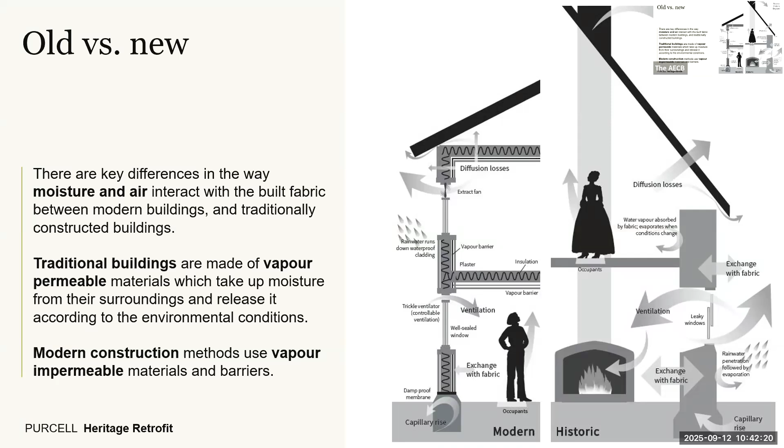And the other thing to consider, and this is true of any building, is that a building is a system, so there's lots of interconnected components, people, services that all interact with each other. So if you change one of those components without considering how it connects to other things, you'll have a potentially negative knock-on effect to something else. So for example, if you seal up all of the windows, insulate, and you've increased the air tightness of a building without thinking about ventilation, you will have unintended consequences.

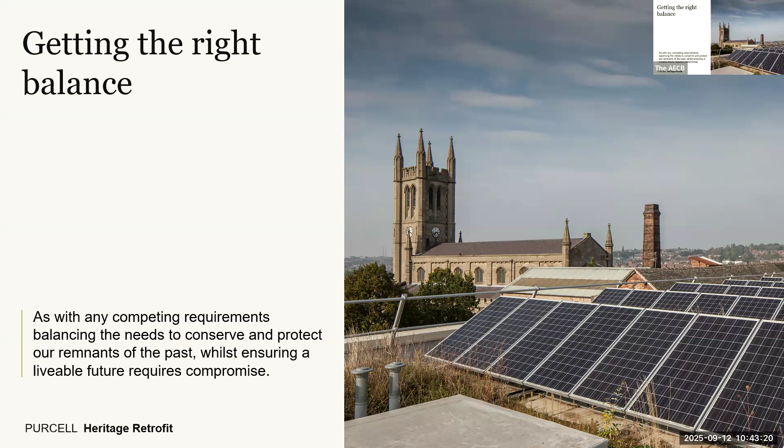And so in heritage, it's always about getting a balance right. It's always about measuring the harm versus the benefit. And there's always going to be compromise. I think there isn't any project on new build or retrofit that doesn't involve compromise. So I think it's just about how you tell those stories and how you get the best outcome for the building and the occupants. And obviously, you all know already the AECB resources, so I haven't got those on here, but there's a few others that might be useful. So there's PAS 2035, which is for retrofitting housing, and PAS 2038, which is for retrofitting non-domestic buildings.

Both have quite a clear process of how you go through things, and it does add on to how you deal with that in heritage properties. The STBA has this amazing wheel which defines that system, the building as a system approach. So you click on one element and it tells you through these linked diagrams what the knock-on effects of changing that would be. It's a really good interactive tool, I recommend it.

And then last year, Historic England brought out this Adapting Historic Buildings for Energy and Carbon Efficiency. Historic England have been really trying to help with these kinds of conversations. I think they don't want to be seen to be lagging behind the narrative on climate change. So they are spending quite a lot of resources and energy in this space. So that is another one that is good to have a look at.

We also have our own toolkit, which we developed with City of London. So I'm going to talk through that briefly. This started out because City of London has got a net zero target of 2040 across the entire Square Mile. For anyone who doesn't know, City Corporation is the local authority that governs the Square Mile.

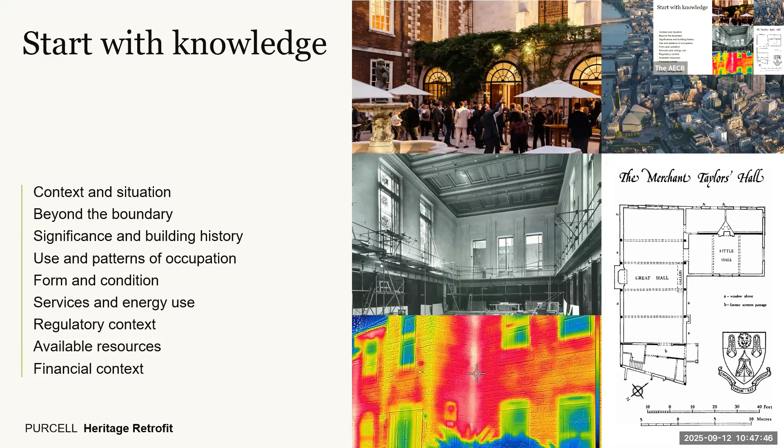And then layer that with a deep understanding of the building's performance, its condition, how it's serviced, how much energy it's using, all of those kinds of things, and start building a picture of why it needs to change and how you might do that. And the city was really keen that we had, quite upfront in the process, this identification of climate risks.

They've spent quite a lot of resource and time looking into climate resilience in the city. They've identified 6 key hazards. Most significant to historic buildings would be overheating and flood risk. And they wanted to make sure that that was considered as part of this early process.

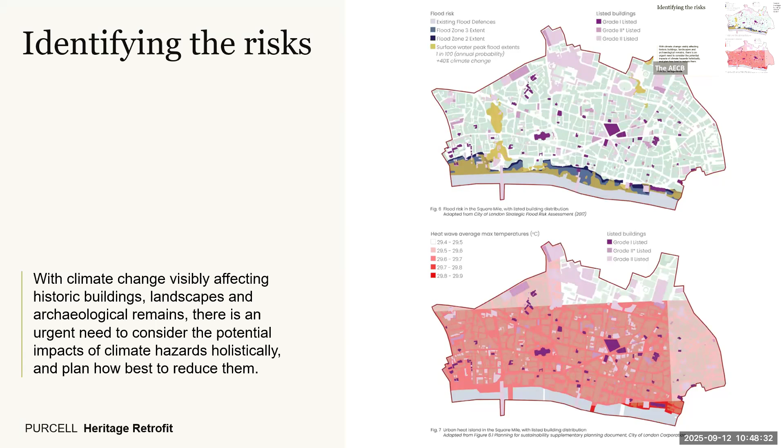And really that's to avoid abortive work. If you're doing something now that has to last for 30 years, the climate's not going to be the same in the next 10 years. We already know that from this year. So I think having that future-focused process early on is really important to them.

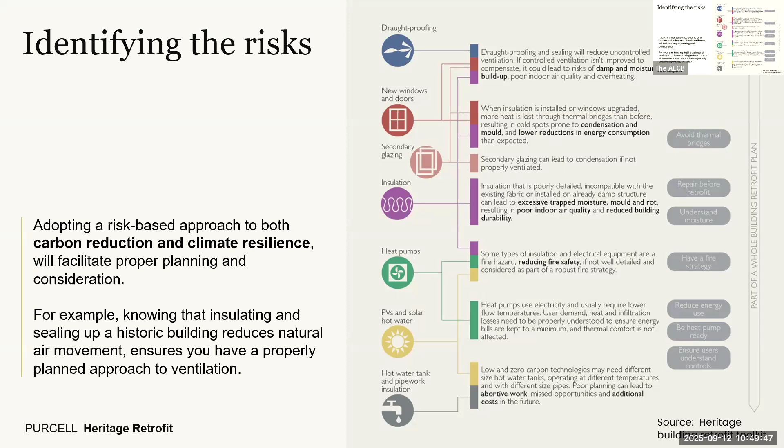The other thing when identifying risks is what I touched on earlier around the differences between new modern methods of construction and traditional methods of construction, and that potential for maladaptation, the potential for changing something with unintended consequences. And that includes potentially damaging heritage and historic fabric, but also the indoor air quality and things, and understanding the interconnected links between those. And I will credit, so this diagram I redrew just for the graphic style, but I would credit LETI because this was largely learned from them.

And then the third step is about evaluating opportunities, and I'm always for putting everything on the table and then taking things off when you're told to. And I don't believe that there's ever an argument of you can't do anything. I think there's always something to do. And I think this hierarchy helps you think through that process. So we've talked a little bit about knowledge and starting from a deep understanding of the site. But the first step after that is around eliminating unnecessary energy and resource wastage.

So do you have gaps and cracks? Do you have windows that aren't sealed properly? Do you have spaces that are being heated but not used? Do you have occupants that just leave the doors open or leave the windows open in cold weather? It's really looking at how the building is being used and what condition it's in.

Then it's about mitigating the impact of unavoidable energy and resource use. And that's more around what easy wins, what lower hanging fruit can you do, LED lighting being the obvious one. You'd be surprised how many historic buildings don't have LED lighting. Energy efficient appliances, efficient use of space, zoning. Can you change the controls easily to just zone things differently? Turn your thermostat down 1 degree.

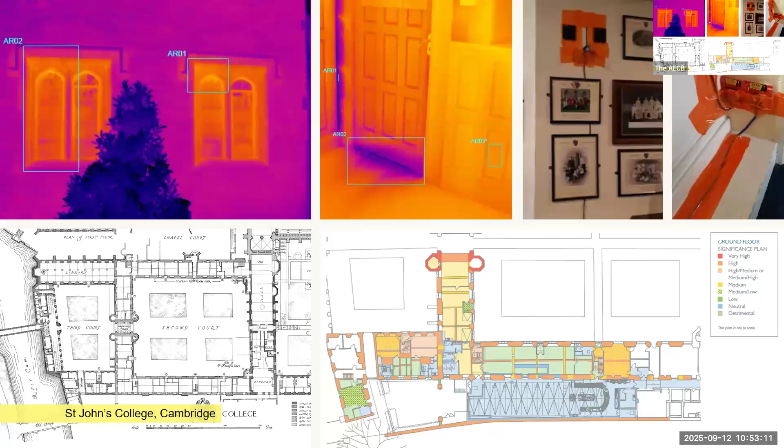And following that process, starting from a position of knowledge, I'm going to start with the bottom right-hand image. That is a significance plan, and is a really common way of depicting in heritage how significant different parts of your building are. Just because it's grade 1 listed doesn't mean that everything is the same age, doesn't mean that it hasn't changed over time.

And what you can see from this is that the very high, the kind of red areas, apologies for anyone who's colorblind, these drawings are not helpful for you, but you could take my word for it. So the very high being red, going down, and then the low significance, you can see kind of like the floors, some of the internal partitions, because they've been changed over time, they've been altered.

So here actually a kind of newer concrete slab had been poured on the ground floor. There had been lots of changes to the internal partitions. There's timber paneling to the inside face of the rooms, which they did a huge gazetteer of information about from the archives of the college, just to prove that things had been moved around, things weren't always as they'd originally been built.

And then layered on top of that, there was a lot of investigation into the performance of the existing building. So you can see some thermal imaging shots there, just showing the drafts, heat loss through the windows. There were some U-value calculations done. I'll tell you the U-value test ranged between 2.38 and 0.35 on the external walls. And that was on the same wall. So there's no consistency whatsoever.

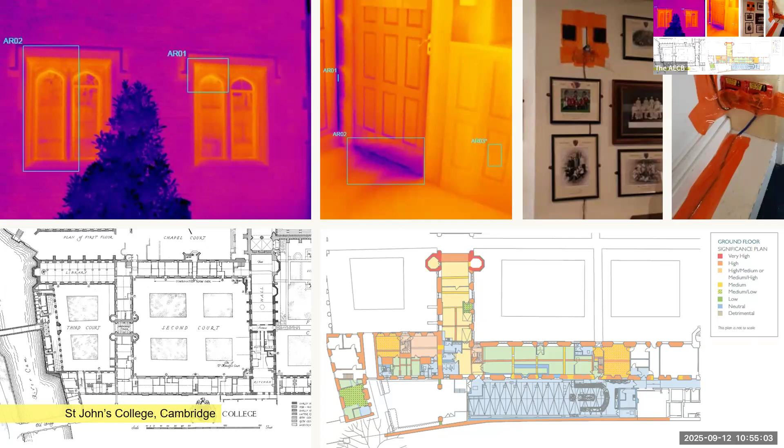There was an air permeability test done, and that got 28. So you can see when you're trying to get to the standards that are set by AECB, you've got a long way to go. But all of that backs up the MEP consultants, KJ Tate, and they did a lot of modelling with IES, and we developed 7 different options. Model 1 was the existing option, around various levels of intervention.

I'm not going to go into the detail of all of it, but Model 4 was deemed to be the one that saved the most energy, saved the most carbon, but with the least seemingly drastic intervention to the historic fabric. And the only difference between that one and the one that was the most energy saving and most carbon reducing was the glazing, which I'll come back onto.

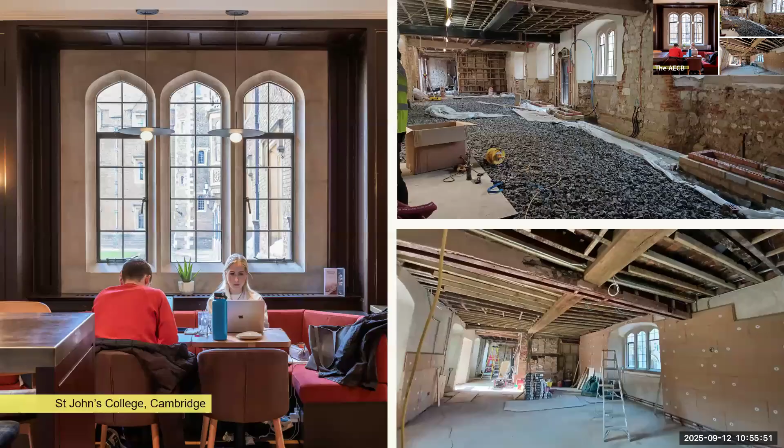So you can see here, this is a grade 1 listed building. You can see the level of intervention that was carried out. The whole floor was taken up and foam glass insulation put down and a limecrete slab. And then there was wood wool insulation put onto the internal face of the external walls. There was soffit insulation. And I think this just shows that you have to break eggs to make an omelette, whatever that saying is. It ended up being quite significant interventions in this very sensitive setting.

And the windows was an interesting debate. It always is. I'm sure some of you might have stories of window replacements, or trying to get rid of window replacements in historic buildings. We settled on a histoglass, which is thermally enhanced, better performing than what was already there. We kept the existing frames.

We did do a mock-up of a slimline double glazing unit using the same materials, but the conservation officer and Historic England had concern about how that would look in the court, because we were only changing 4 of the windows in that court, and how it looked as a collective. Whether you agree with that or not as an approach, that's one that they took.

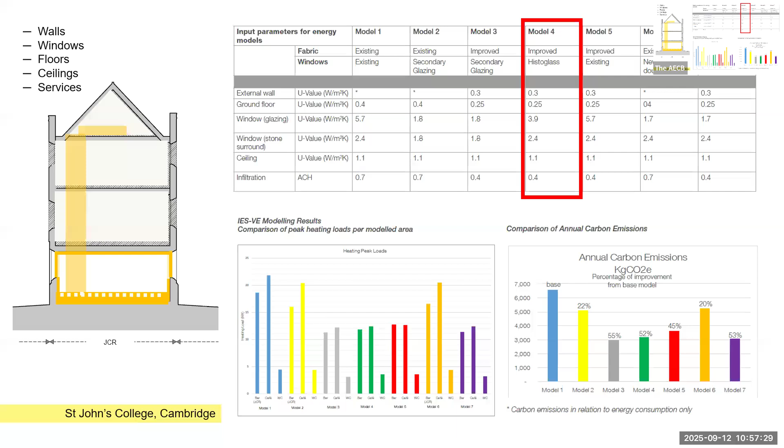And so the next project, sorry, I should say that the interventions that were selected achieved a 39% reduction in energy use and peak heat demand. So it's significant. And I think because the windows are so small in relation to the overall elevation, insulating the external walls had a bigger impact than changing the windows.

Smithdon School, it's a completely different building. And I'm really excited I get to talk about this because we've just got planning for it and I wasn't allowed to talk about it before. So I have some Smithdon School facts. I don't know if anybody knows who these two are.

Alison and Peter Smithson. So Smithdon School is one of the country's most significant modernist buildings, designed by Alison and Peter Smithson. It was completed in 1954. It's grade 2 star, so it's in that top 10% of all listed buildings in England. And it was considered a really radical approach to steel and glass. It's very modernist. And it's been used as a school for 70 years. So like most modernist buildings, it wasn't designed for climate change.

It's one big thermal bridge. It is single glazing, it's got steel sticking out, it's got no insulation whatsoever. And it's Grade II* listed. So in theory, it is an incredibly difficult building to change and alter. However, as a school, it doesn't function because it's too hot in the summer, it's too cold in the winter. There's issues with glare, overheating; they are on the verge of moving out as a school. It's a public school, sorry. Yeah.

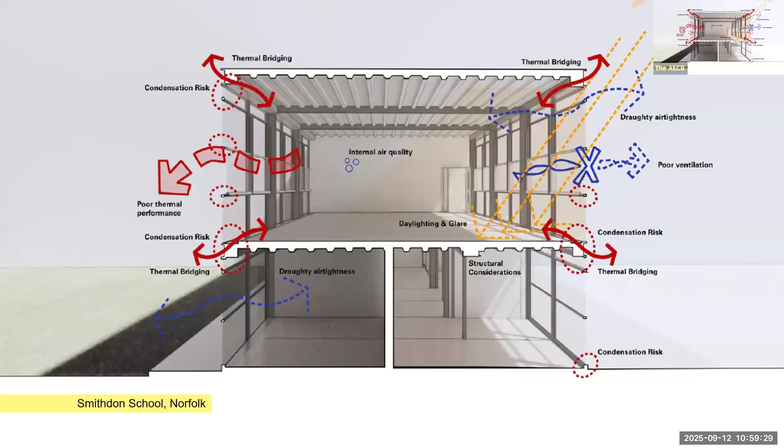And so it's quite clear that a wholesale refurbishment of this building is needed to keep it functioning as a school. And one of the things about heritage significance, I think, is that use is so often connected to what is significant about a building. So being able to preserve the originally intended use is seen as a benefit. And if you're not able to retrofit and make the alterations to enable it to function as a school, you're losing that use. I don't know who would want to work in this space, and you're then risking the future deterioration of this piece of architectural heritage.

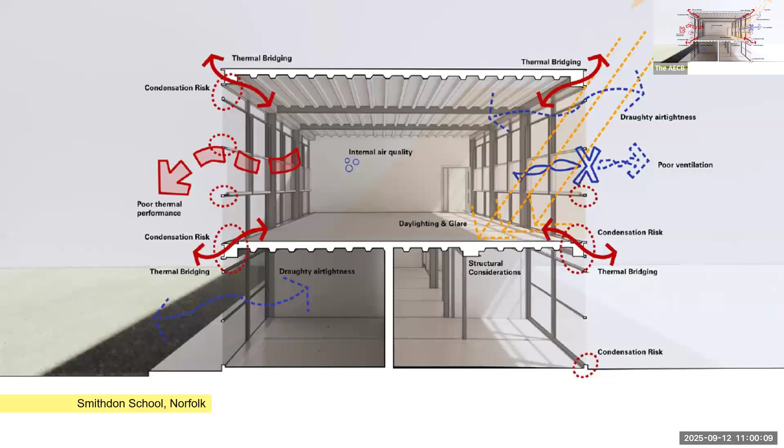This is the 3D version of that significance plan that I showed you for the other project. And the reason it's a 3D version is because you can't think about the significance of this building in plan form. It was quite clear to our heritage consultants that to understand the significance of this building, you're not considering how old the fabric is, because it's 70 years old, it's not that old. What is important about this building and why it's listed is the architectural composition of it and the steel frame.

We should say we're working with Jestico + Whiles on this as well, and Arup. But what the Purcell team did was a condition survey, which went round and documented every single window on site and determined how things had changed, what condition they were in. So this one is showing, for those of you who aren't colourblind, again, I'm sorry, the green is the original glass. So much of that building has already changed. And so you're not preserving something that is old. You're not preserving something that's original. You're preserving a framed building and the composition that it has as a piece of architecture and its use as a school.

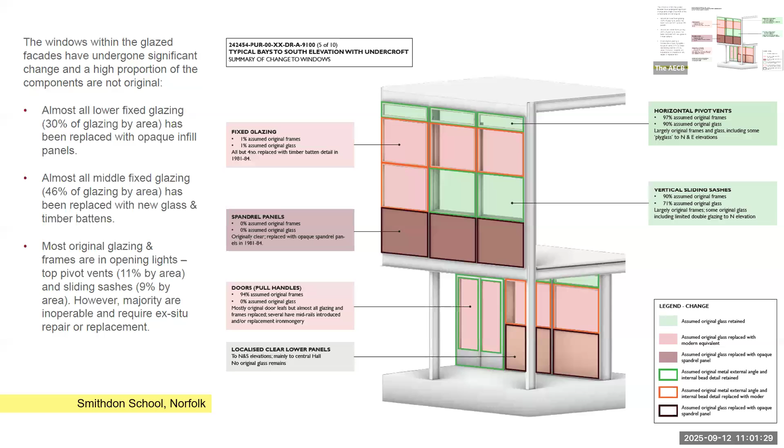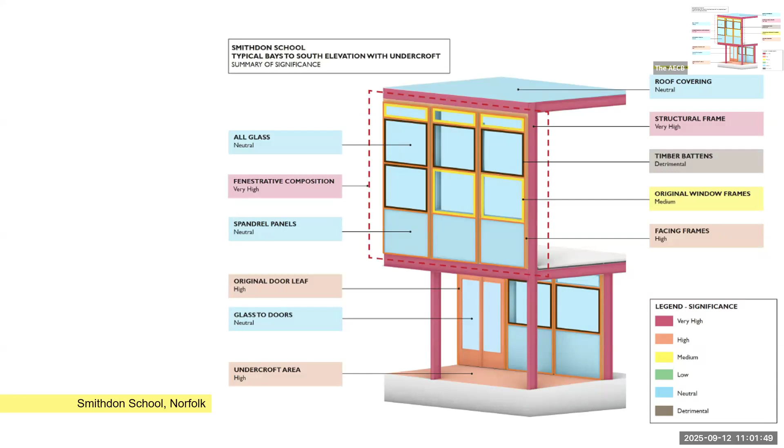So this is the significance drawing that shows the red, depicting the structural frame, is of very high significance. The blue windows and the roof covering are very neutral in terms of significance. So they're not really having any impact on the significance because they've changed it so much. And so what that framing allowed us to do was to justify some complete wholesale changes to the fabric of a Grade II* listed building. And so we're insulating, we're changing the windows, we're having them thermally broken.

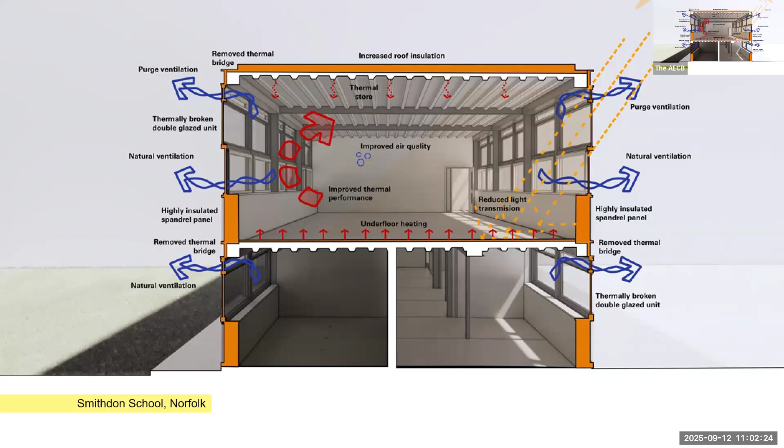Also, I haven't got the drawings here, but in the design and access statement, there's lots of different iterations of breaking the structural frame, because the window frame was part of the structural frame. So it was all connected and a huge cold bridge. It's probably better shown in this one. But how that gets detailed has already been very well thought out just at planning stage. If you went through the design and access statement, there's a huge amount of detailed drawings for a planning application.

And the reason that this has been approved at planning is because we took Historic England, the 20th Century Society, and the Conservation Officer on that journey all the way through and explained to them what is important about this building, why it's important that it gets retained and used as a school, and how the design of the building is having a detrimental effect on its ability to last any longer. So it's watch this space. It's hopefully going to be on site quite soon.

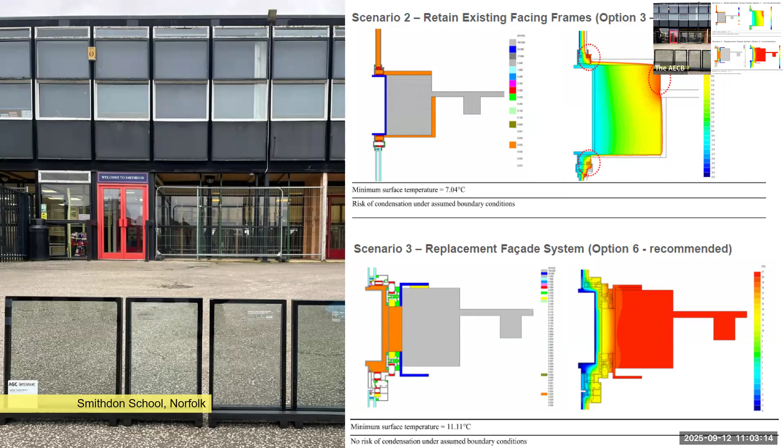I'll whiz through a couple more. I've not got that many. And then there's time for questions before coffee.

We got the glazing specialist in to try and date all of the different windows and help make the justification for why we could change some. They wouldn't let us change all of them. So it was very much a piecemeal approach, again, coming back to that compromise. But it has had a fundamental impact on the comfort of the spaces internally.

Salford Cathedral is a really exciting one because Salford Cathedral want to be the greenest cathedral in England. They're very competitive. And they would need to do a huge amount of fabric upgrades. And they've invested a lot of time and energy into how they might decarbonise. And you think of it's a challenging building to address.

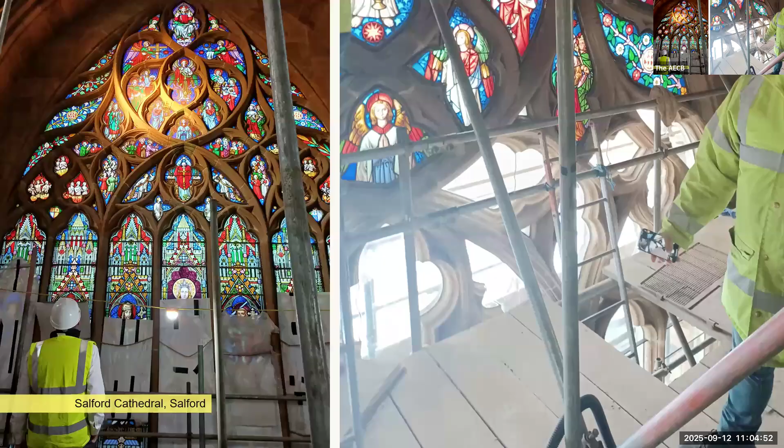So because the roof had come to the end of its life, we're insulating the roof; it's already gone on. The floor came up, there's insulation under the floor with underfloor heating. But the more interesting thing, looping back around to windows really, is that the stained glass all had to come out. It had lots of gaps, it was in poor condition. So it all had to come off.

And what we've done is move it inward so that we could get secondary glazing on the external face. Sometimes you see churches have got the grating on the outside to protect the stained glass from vandalism; this has removed the need for that as well. So you're getting heritage benefits actually, because you can better see the stained glass from outside.

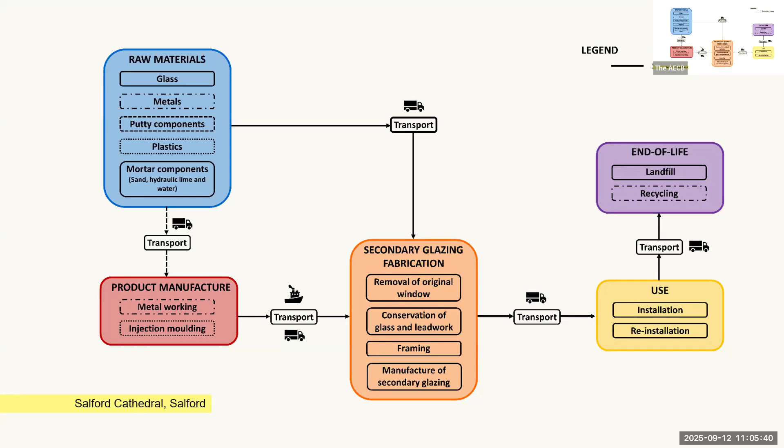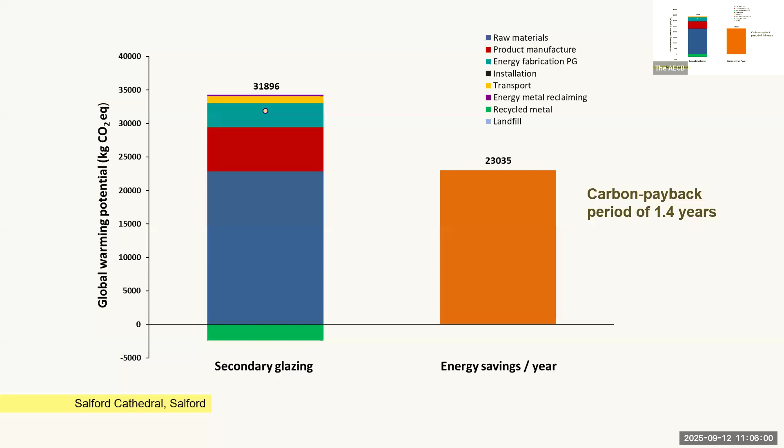And we got some help from University of Manchester, who did some life cycle assessments on the windows and looked at the secondary glazing specifically, because they found it quite interesting. And we were interested to know whether or not it was worth it. And actually, with the energy that's being saved because of that one intervention, the carbon that it cost to put in the secondary glazing is paid back in less than a year and a half. So I think that's quite a good advert for considering it.

And then this is the last one I wanted to talk about, just because the ones I've talked about so far are all big, very significant, maybe not really scalable solutions. And this is a project that we're working on which probably has the most scalability, and that's because of the approach. So there's 60 Grade 2 listed railway cottages in Crewe. In Crewe, we're working with Cheshire East Council, and they wanted to come up with an approach to these houses because they are quite repetitive.

And we're working with Historic England to draw up a local listed building consent order. For those of you who don't know, probably one of the most prominent examples of this is in Royal Borough of Kensington and Chelsea. They did an LLBCO for solar panels to Grade 2 listed buildings. So you can essentially install solar panels on your Grade 2 listed property in Kensington if you follow their guidelines without getting listed building consent. So it's taking out that administrative burden, both on the homeowner and on the local authority.

And so we're going through a similar process, but not just with individual components, but on a whole life retrofit approach. We've got a number of different, like a bronze, silver and gold approach to the retrofit of these homes, which are all being looked upon favourably by local authority, conservation officers and Historic England. So it's a good mechanism for scaling.

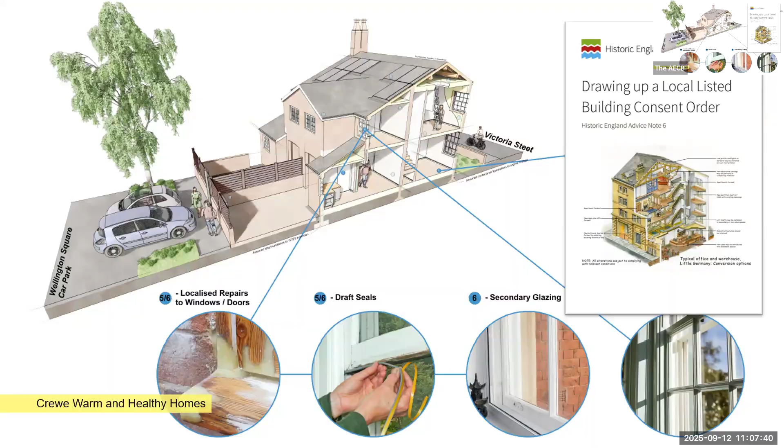And really this is just to sum up. So start from a position of knowledge; hopefully that's been hammered home. Understand the significance, ideally with heritage consultants or conservation architects if you can. Regularly engage with statutory consultees, so engage Historic England and local conservation officer and any other interest groups.

Take a whole building approach and try and make the biggest improvements in the areas of the least significance when you have that understanding. And we talked about use of building, and continuing the use and enjoyment of these buildings for future generations being at the heart of all of this kind of work.

And yeah, that's, oh, I have got a quote at the end. Oh no, I've just lost it. There we go. This is from the Society for the Protection of Ancient Buildings. So just to, again, reiterate the inherent link between conservation and climate action.